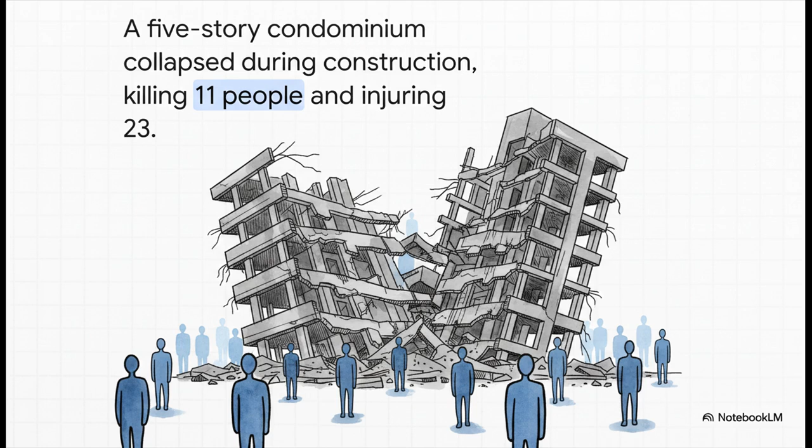Take the Harbour Cay condominium in Florida, back in 1981. A 5-story building, still under construction, just pancakes. 11 people lost their lives, 23 more were injured. Those aren't just statistics, those are families and lives shattered in a moment. And this wasn't some freak, one-off event. Just 10 years earlier, in Boston, it was a similar heartbreaking story. A 16-story apartment building collapses. You start to see a pattern here, a recurring nightmare in our construction history.

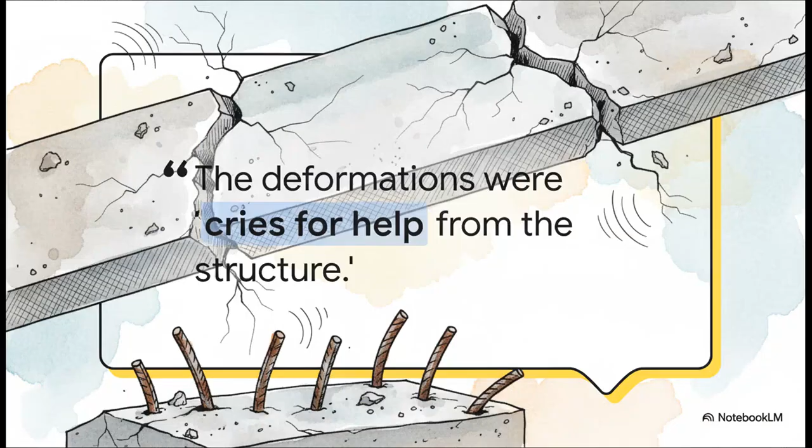The thing is, buildings don't usually fail in silence. There are almost always warning signs. Forensic engineer Dov Kaminetzky put it perfectly when he was investigating a collapse. He said the bending and the cracking, those were cries for help from the structure. Wow, the building itself was trying to tell us something was horribly wrong.

So that really gets to the heart of it, doesn't it? Why does this happen? Well, it's almost never one single thing. It's more like a slow-motion train wreck, a chain reaction of mistakes, shortcuts, and oversights that just keep piling up until the whole thing can't take it anymore.

So let's do this. Let's get into the weeds and dissect one of these failures. We're going to use the 2000 Commonwealth Avenue collapse as our case study, because honestly, it's a textbook example of how a bunch of small mistakes can cascade into total disaster. Just look at this list. It's staggering. From the very beginning with the paperwork all the way to the concrete mix itself, almost every single step of the process had a major flaw. It wasn't one thing that went wrong, it was pretty much everything. It's a tragic illustration that a collapse is rarely a single event, but a death by 1,000 cuts.

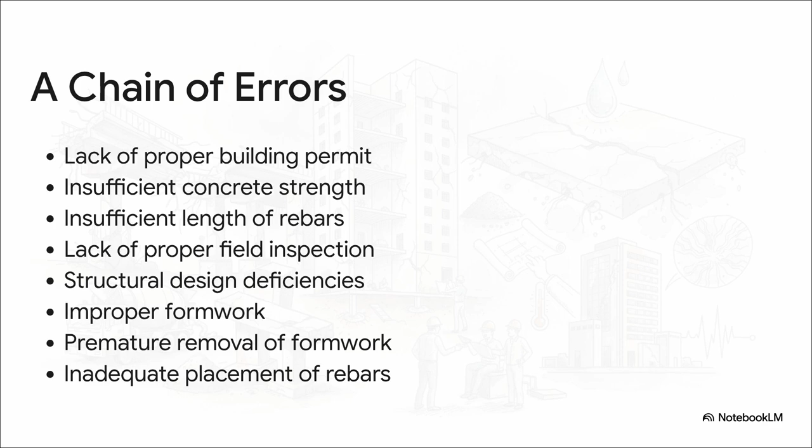Now, the technical term for what kicked off the collapse is punching shear. The best way to picture it is to imagine pushing your thumb right through a piece of cardboard. That's basically what a support column did to the concrete floor slab. Without the strength and support it needed, the column just punched a hole, and then everything else came down like dominoes.

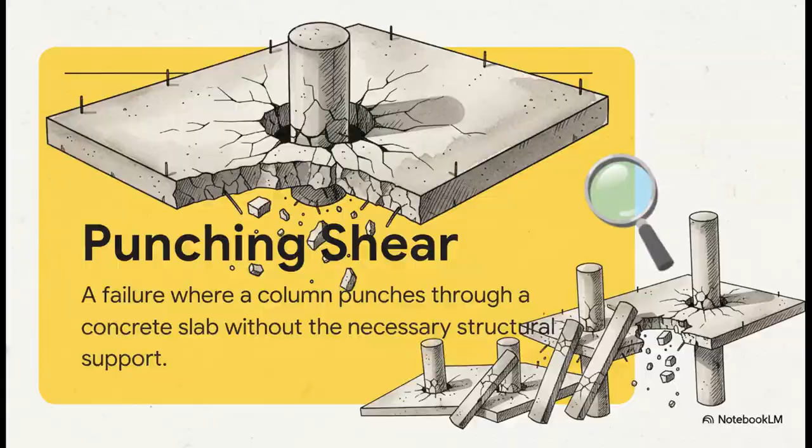And if you're looking for the smoking gun, well, here it is. The concrete itself was dangerously weak. It was designed to handle 3,000 pounds per square inch of pressure, but when they tested some of the samples from the site, they clocked in as low as 700. That's like trying to build a house with bricks held together by wet sand. It was doomed from the start.

Okay, so we've seen the absolute nightmare scenario. Now let's flip the script and talk about why this doesn't happen every day.

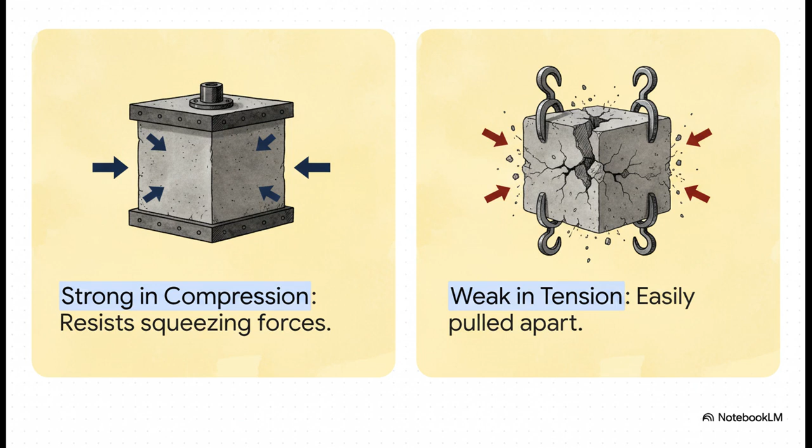Let's look at the unseen shield that makes our buildings so incredibly strong. Reinforced concrete. When it's done right, it's nothing short of an engineering marvel. See, concrete by itself is kind of like a one-trick pony. It's fantastic at resisting being squeezed. That's called compression. But try to stretch it or pull it apart, put it in tension, and it just snaps. It's incredibly brittle. That's concrete's big weakness.

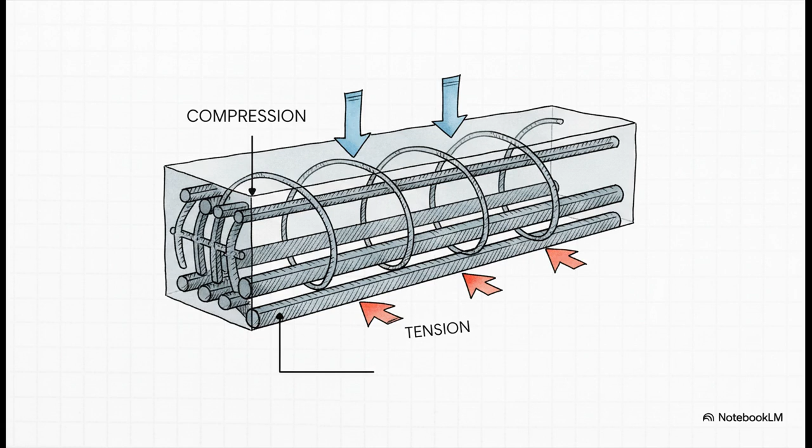So what's the fix? Well, it's actually genius in its simplicity. You embed steel bars, what we call rebar, right inside the concrete. Steel is the exact opposite of concrete. It's amazingly strong when you pull on it. So the steel handles the pulling forces, the concrete handles the squeezing forces, and together they become this super material that can do both. And that's the crucial point.

It's not just a matter of mixing some concrete and throwing in some steel. It has to be a precise, disciplined process. There's a blueprint for safety, a right way to do it. When you boil it all down, it comes down to these 4 critical pillars. First, you build a strong mold, the formwork. Then you place that steel skeleton, the reinforcement, exactly where it needs to go. Next, you pour the concrete and make sure there are no air bubbles. And finally, you let it cure properly so it gets up to its full strength.

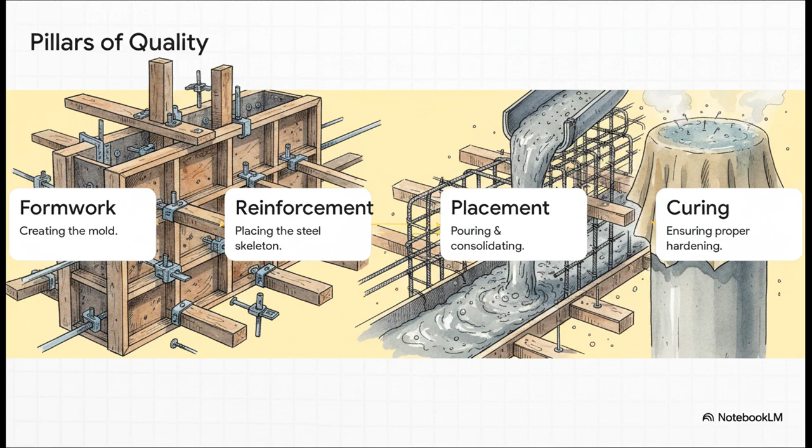Now let's connect this right back to that Boston collapse. Remember one of the key mistakes on that huge list? Insufficient length and placement of rebar. The steel skeleton, the very part that's supposed to handle all the pulling forces, was messed up from the get-go.

And this is what it's supposed to look like. See that? A meticulously organized grid of steel, all tied together. The bond between these steel bars and the concrete that surrounds them is absolutely everything. If that bond gets messed up because of dirt or rust or just bad placement, the whole system gets weaker.

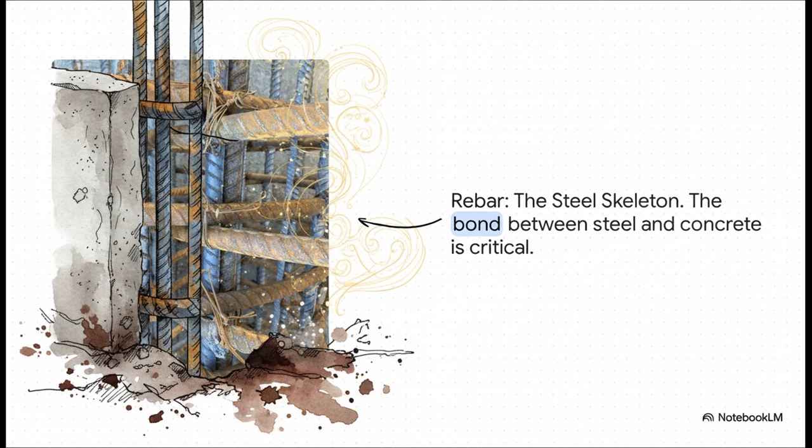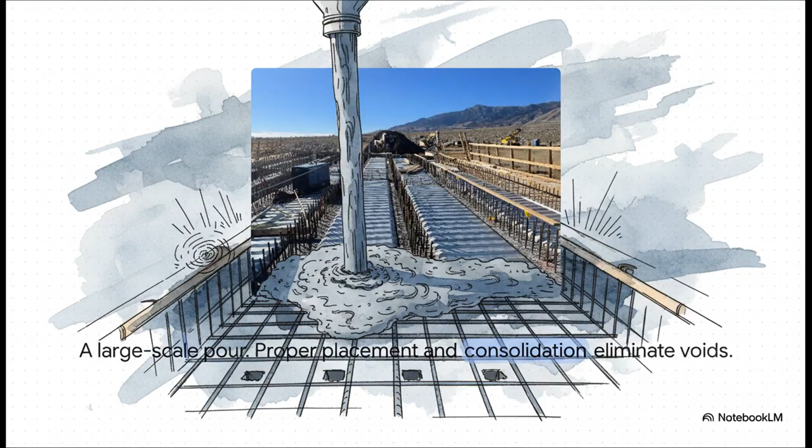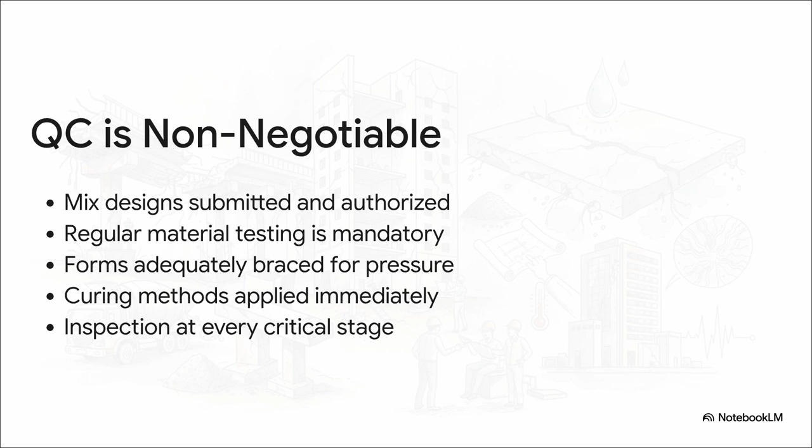And underpinning all of this, like a safety net, is just relentless quality control. This part is completely non-negotiable. Every single step has checks and balances. Mix designs are approved, materials are tested, forms are inspected. It's a chain of custody for quality, and every single link in that chain has to be strong.

So, after all that, what are the big lessons we've learned from the rubble? In a way, the whole field of structural engineering has been built on the foundation of its own failures. Every single collapse, as tragic as it is, is a vital lesson. You can actually see this learning process in action over the years.

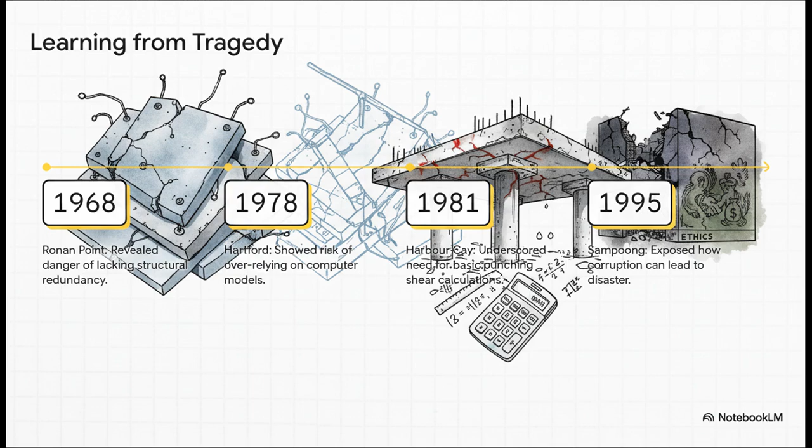Ronan Point taught us we need fail-safes, structural redundancy. Hartford taught us not to blindly trust computer models and to listen to those cries for help. Harbour Cay was a brutal reminder to always check the basic math. And Sampoong, well, Sampoong showed us that sometimes the failure isn't technical at all, but ethical, rooted in corruption and greed. And that really brings us to the most important point.

Studying why things break is how we study the history of engineering itself. It's not about pointing fingers, it's about learning. Every twisted piece of steel, every slab of broken concrete holds a lesson. These failures are the tough teachers that force us to write better codes, to improve our methods, and ultimately to rebuild the trust that holds our entire world together. The real challenge isn't just learning these lessons, it's making sure we never ever forget them.